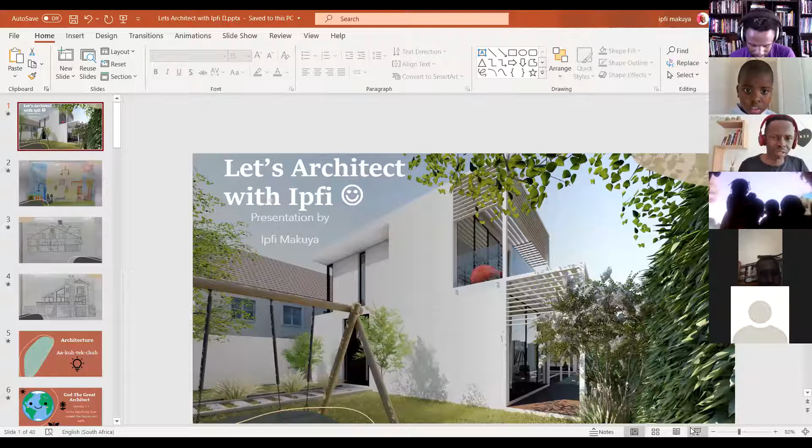Okay, all right, so I'll begin my presentation. Hi everyone, yes, our presentation today, as you heard from Lyle, is entitled Let's Architect with Ipfi, all right?

Before I go into the presentation, I'll tell you a bit about myself. I'm from a family of 5, mom and dad. I've got 2 sisters, I happen to be the only boy in the family. I'm the middle kid also, so yeah, my big sister and the little sister. Things I enjoy doing: I personally love drawing a lot of things, I enjoy listening to music, and I also enjoy meeting new people every now and then.

Moving on with the years, I started exploring Paint. I don't know if you guys use it today, but there's this application on your Windows laptop called Paint. That's where I would normally draw, like when I wanted to see how real it could be. This was roughly 2006 - I think I was in grade 4 when I was doing this.

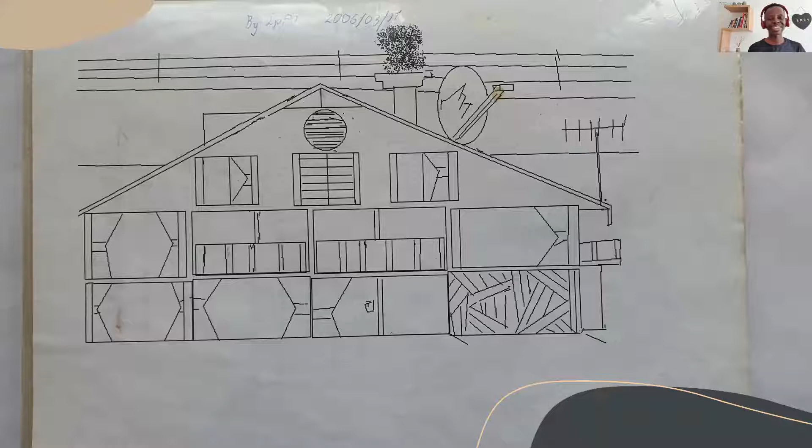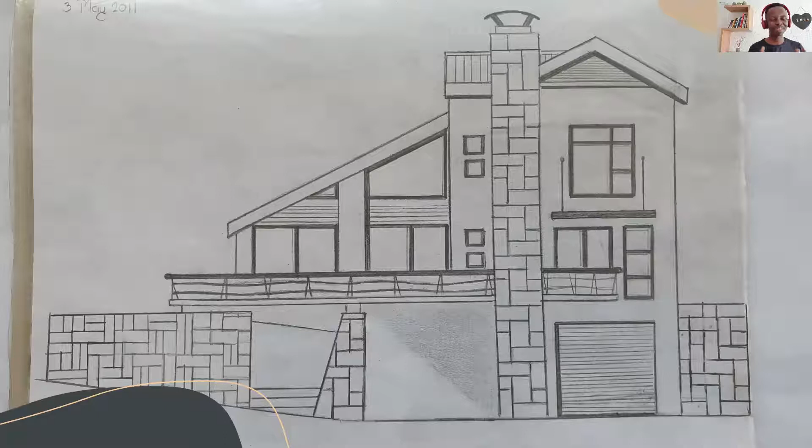I've always wanted to just draw houses, everything houses, every now and then. As time went on, it becomes a craft that one starts to perfect over time, provided I have a better understanding of how things are done. This was one of my favorite houses. I didn't design it from scratch, I'll admit that - it was a house I actually looked at, and I thought let me see if I could draw something similar. I realized I could come up with something close to it, and it's one of my favorite drawings growing up.

But now let's jump into our topic for today. Just want to move this slightly up. So our topic for today, like I said, is Let's Architect with Ipfi.

The word, of course, is architecture. I tried to put it in a way - if you fail to pronounce this word, I tried to put something very simple for you guys so that you're able to pronounce it. It's pronounced as architecture. Yeah, that's how it's pronounced. It's not a very big word whatsoever, but that's how you actually pronounce it.

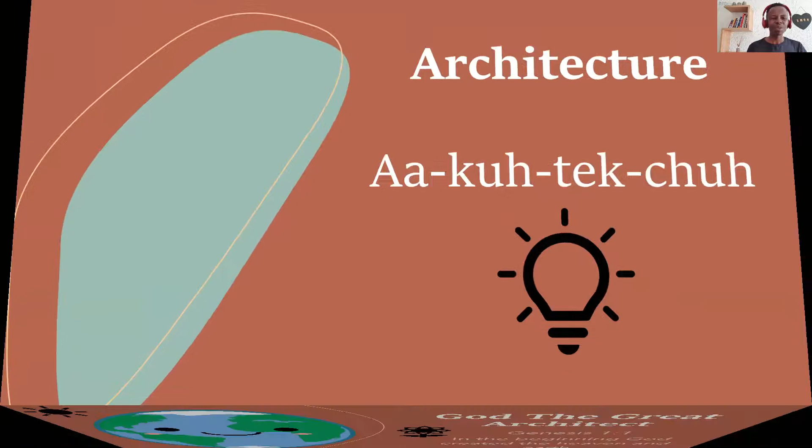And where did everything start? Everything started off way back, when God created the heavens and the earth. This is something we get in the book of Genesis 1, verse 1. In the six days of creation, God created everything that we see today, and it was good. It was beautiful. Things were lush. Things were just very lovely back then.

And it happened, sadly, that our parents were tricked by the devil himself, and eventually when they got tricked, they ate of the forbidden fruit and sin entered into the world. That's why today we have all of these bad things happening - we have people killing each other, we have people stealing from each other, we have all of these horrible things happening.

But then that's not the end, and that's just something God wants to do with us today. God wants to fix the earth. God wants us to fix the earth with Him today as we speak, and there are many ways we can contribute to this. There are other people deciding, okay, I'll join the police force and be part of those who protect people from those that harm them. There are other people saying, I will do this for the poor, for those that don't have food - I'll be there handing out food parcels and so forth. Everybody wants to do something. But today, I'm not going to focus on those people.

By the way, the guy that I mentioned earlier as an architect, that is Bjarke Ingels, one of my favorite architects. And this is a building that he designed.

So moving on, then we start seeing the word architecture, right? When we talk of architecture, this is the art or practice of designing and constructing buildings. So the things that you design, the things that are built, the things that people live in, that is what we call architecture.

Now that we know the difference between an architect and architecture, we can move on. So the question one might ask is, how long does it take to be an architect? Honestly, I used to think it takes 3 years, as long as you have a degree in your hand, you're happy, you're able to go out there and start designing and building. But the reality only starts hitting you when you start studying architecture, and they let you know that no, it doesn't take 3 years, it actually takes roughly 8 years.

So what happens is that you'll go to university. There's primary or high school, then you come into university. When you're in university, you would take your undergrad degree, and that would be a period of 3 years when you study architecture. After that you would graduate, and you'd have to be in the field for at least 1 year. This is you getting exposed to how things are run, why things are done the way they are done. So that's your 1 year experience.

After that, you are able to apply for your honors degree, which puts you on another level where you become a candidate senior architectural technologist. This is a person who is able to understand everything technical in the architecture industry. They also know what design is, but haven't fully grasped it yet. As a candidate, you'd deal with everything technical in architecture. Then after that, you have your 1-year master's degree, and that's when you become a candidate architect.

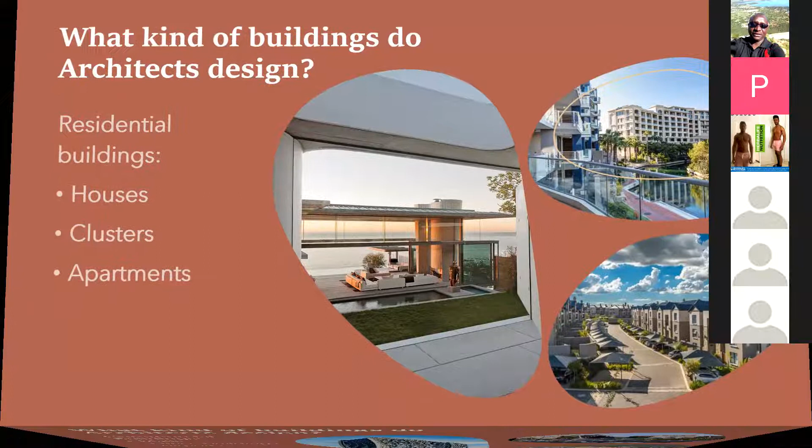Also, other kinds of buildings architects would do - you can go into healthcare, your hospitals. Remember, I said nothing is by chance - someone has to sit down and say we're designing this from scratch, we're doing this, we're doing that. Someone has to design these things. So your healthcare, your hospitals, your clinics - you like going on holidays, right? And when you get there, there's a nice fancy hotel - an architect had to come and design those things. Public schools, universities - someone had to sit down and call his team together and say, guys, we need to design a place where children can be there, able to learn throughout, graduate at some point, and give back to society. Basically, anything that is a building is designed by an architect.

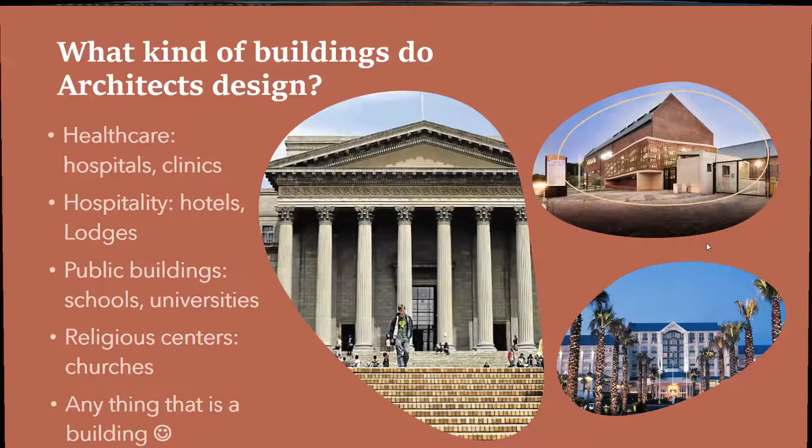Personally, I still think the secret to getting such a beautiful building was that the architect based the idea of the building - he related it to a verse in the Bible. So that's going to be homework - go check what verse this architect used in order to design such an amazing thing.

Honestly, I feel like God was showing off here, saying, oh, you're using the Bible to design a chapel? I'll also give you inspiration. This was really lovely. I love this building.

So the question then becomes, do architects only design buildings their whole life? That's a question I also once had with myself. I'm like, wait, does this mean that my whole life I'm going to design buildings and buildings and buildings? Here's the nice thing about architecture, right?

And you could also be involved in designing the next Mars cities. Lately we've been seeing a lot of rockets take off, going to space. People are curious, people want to know things. Architects can also be involved in designing those cities that are going to be on Mars. I know Mars is very far, but it would actually be a very big honor to design something on Mars. So architects can actually get involved in doing such things, designing cities on Mars.

Also, it doesn't end there. I've been following a couple of architects, and this was one of my biggest curiosities. One time I happened to watch a documentary about F1, and when they were showing Monte Carlo, I was curious like, okay, these yachts, where do you even get a designer, someone who does this? When I followed a couple of architects, I realized that actually some of the people who design these yachts have a background in architecture.

So architects don't only do buildings, you go as far as designing yachts. If there's something I love about yachts, it's the fact that you get a different view every day. Today I could be sitting in the yacht, working inside it in my little office space, looking at the Bahamas islands. Tomorrow I'd be somewhere else in the world. It really fascinates me that this is the kind of thing your architectural degree can actually get you into.

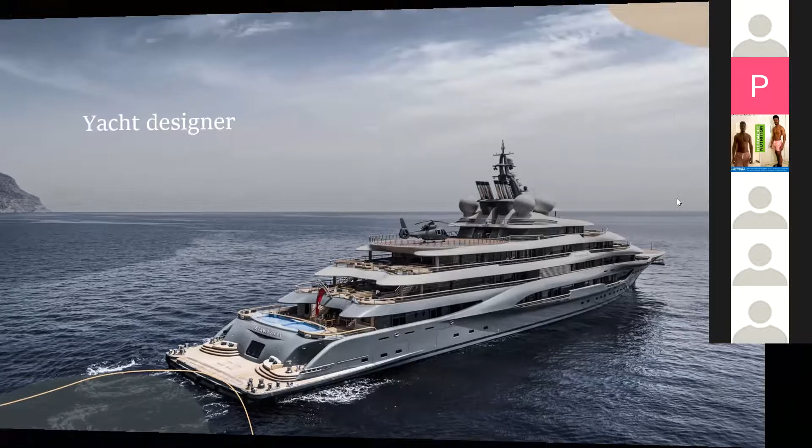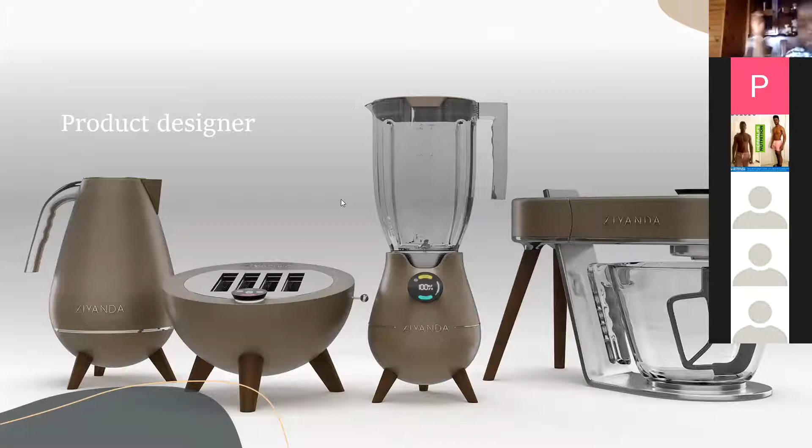And you can also go into product design. Now, we tend to just take things for granted, like the appliances in your house, your Smeg that everybody loves. I purposely put this up because it's an upcoming South African brand, and it's very beautiful. So that's product design, we can go into that too. Like I said, nothing is actually by chance. Nearly everything around you that's designed by someone, as someone with a background in architecture, you could actually go as far as designing products too.

That brings me to who are our best friends as architects. An architect's best friends are their sketchbook and pen. The reason I say this is simply because we have ideas, a lot of ideas.

The best place to always store your idea is in a sketchbook. I have about 4 sketchbooks, and this is an actual picture I took. I use them for different things: one for taking construction notes, one for design, one for when I go to site, and one for when I want to draw sketches.

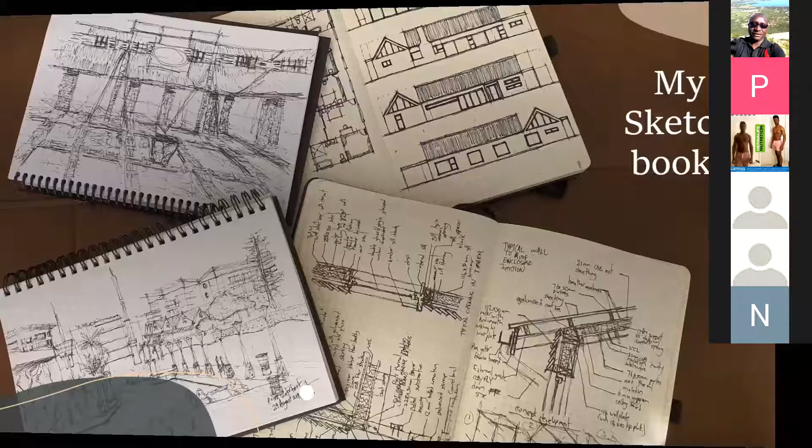This is just an example of the things I have in my sketchbooks. If there are things that really fascinate or capture me, instead of taking a picture, I actually enjoy drawing what I see, because you can capture so much more by hand than by just taking a picture. The other two I use when I'm designing, trying to be technical and draw things to scale.

This one with a lot of notes is the one I actually use in school currently, my construction sketchbook. Whenever I want to understand a detail, it's wrong to just assume you understand. You need to draw it out to fully understand it, and you don't forget things when you draw them out.

Like I said earlier, I use my sketchbooks to sometimes just capture images instead of taking pictures. That's one of the sketches I did when I was in Durban at the beach. I took that sketch instead of a picture, and it really means a lot to me.

So what happens after you have an idea, you've sketched it out, and you've decided this is what you really want to do? Ideas are then tested and finalized on CAD, which stands for computer aided drafting. There are a lot of programs we use in architecture to test our ideas and finalize them.

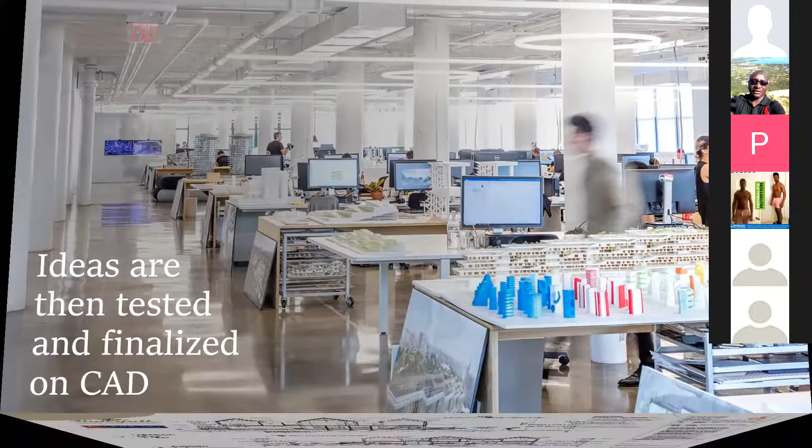Moving on, this is just an example of a computer-aided drawing. When we do drawings on the computer, you need to show nearly everything: how the roof works, which walls are which, how deep they go, what kind of foundations they have, and the windows. Everything needs to be detailed, you need to show the measurements. Nothing in architecture is by chance—everything we do was calculated, drawn, and put into detail.

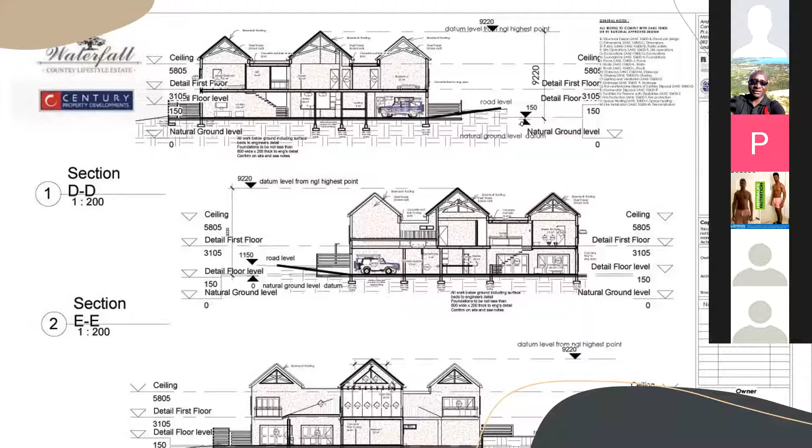So that's an example of a working drawing slash construction drawing. You need to show everything. So what do we do from sketchbook to the computer? The computer will produce drawings, and these are the drawings that you would submit at the municipality, and they would approve them and say, hey, you are good to go build your building. So that's what the working drawing is intended for.

Now, the other thing I have to say is that architects do not work in isolation. What I'm trying to say is, think of Bob the Builder, my favorite cartoon—I might be old, but I still love it. When I say architects do not work in isolation, I mean that when your drawings are approved, you need other people to come into the picture and help you build whatever you have drawn. As someone studying architecture, our biggest goal, nearly every student's aim, is that whatever you draw could one day actually be built. And that's where Bob the Builder comes in—he comes with his team, the guys who actually build the building, and make sure the construction matches the drawings.

So architects never work alone, there's a whole team. You've got your engineers, your quantity surveyors, your electricians, your plumbers—it's a whole team. So architects don't work alone. Architects always work with who? Bob the Builder. I call every builder that, because I really love them for what they do.

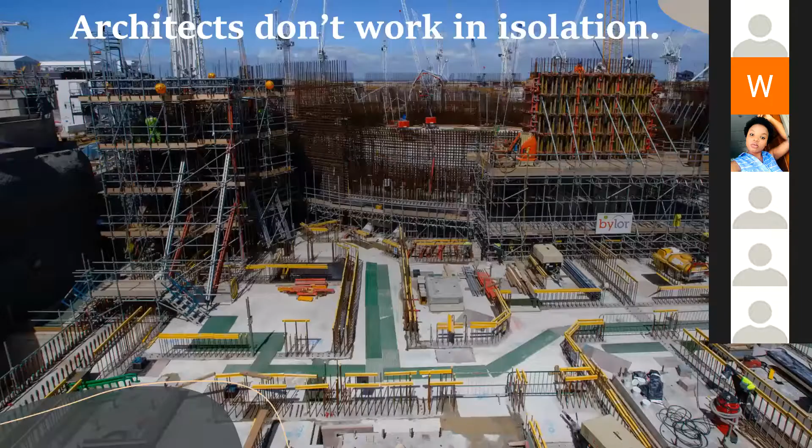So if you're curious what Bob the Builder does, he's responsible for the construction of your building. This is a picture of a nuclear plant that's been constructed. As architects, we can't do this—we are able to draw and design everything you see, all these beautiful building structures, but we can't build them. We need another team to come in and build. And like I said earlier, that's where Bob the Builder comes in and helps us build these kinds of buildings.

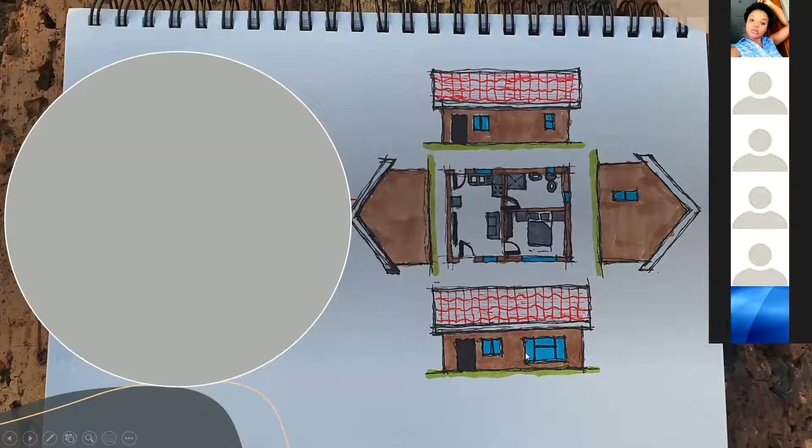So here's the first thing I want to teach you guys. Normally when I approach a house—if I come, I hope you can see my mouse—from this side of the house, the bottom picture, let's look at it. If I come from that side of the house, I could call that side the front of the house.

And if someone else comes from the other side, the top picture, they could call that the front of the house too, because they'd say, 'but I came in from this side, this is the front.' Why would you call that the back and why would I call that the front? So there's confusion about where's the front of the house and where's the back of the house.

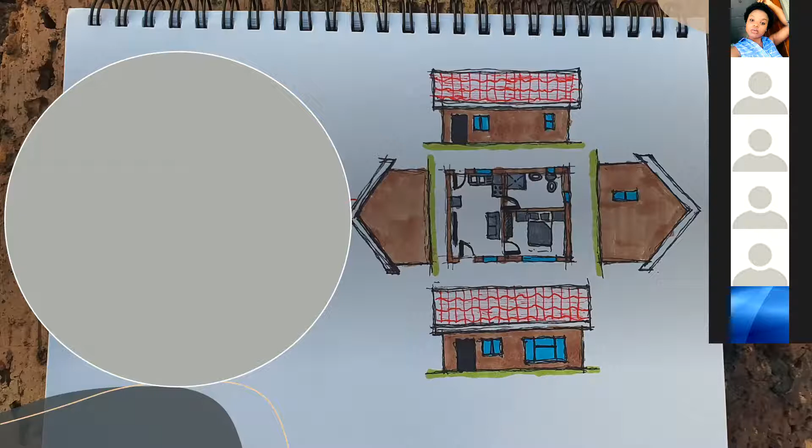So I'm going to teach you something small in architecture that we use to help us know where is where. Like I said, you could tell me the top picture of this house is the front, and I could tell you the bottom picture is also the front. It would become a whole discussion, a whole debate, and we might never really reach a conclusion. So what I have here for you—sorry, I didn't mention it—is a floor plan, showing a little sitting room, kitchen, bathroom, and bedroom.

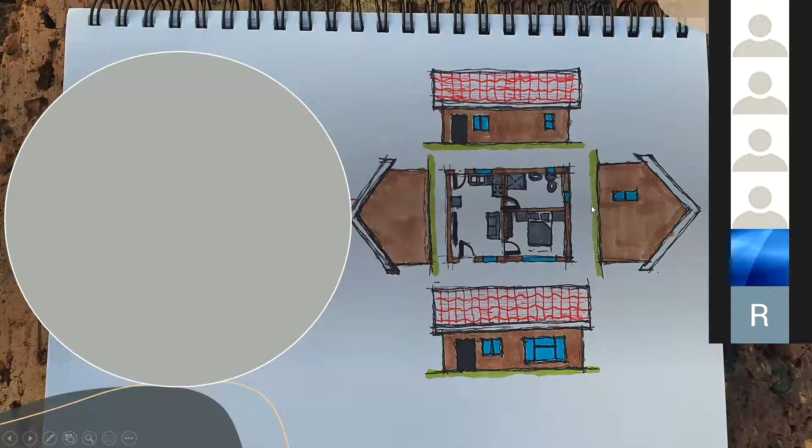And then the house looks like that on the outside. So yeah, we could have this confusion of, oh, that's the back, that's the front. So in architecture, to avoid that confusion of saying this is the front, this is the back, there's this thing that we call the north point.

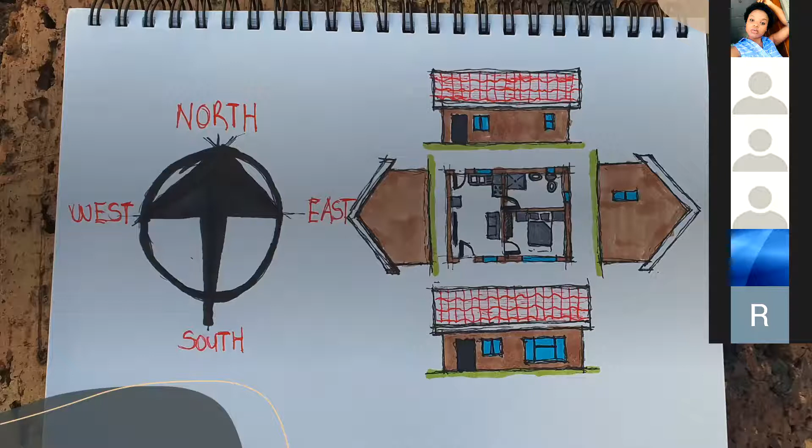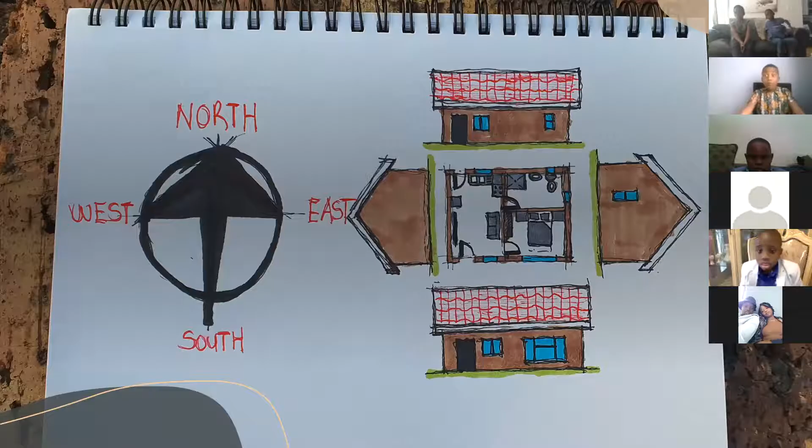We use that thing specifically to show us the certain sides of the house. For example, when we look at this house, if someone asked you which side is north, you would tell them it's the top image, the top picture. That's the northern side of the house. But in architecture, we don't use 'side' to refer to a side of a house. We use this word called elevation. So the one you see on top, you would say that is the north elevation.

And then you would see the image of the house on my right and left. I always have an issue with this. But the image on the right hand side, you would call that your east elevation. And the bottom image, this side of the house, we would call that your south elevation. And then this part of the house over here, you would call that your west elevation.

Any building that you see designed, any structure, any hotel, be it a mall, be it any kind of building that you can think of, it always uses this principle. We use this principle to identify certain sides of that particular building by saying this is the north elevation, this is the east elevation, this is the south elevation, and that is the west elevation.

Even your house, if you can get where the north point of your house is, you would start knowing that, okay, so that side we always come in from, the garage side and everything, that's the northern side. And then the kitchen side, that's the south side, that's the south elevation of the house. Any building uses this principle to know which side is which. That's something you learn throughout your architecture journey. I wish I could teach you guys how to design, but that's a process.

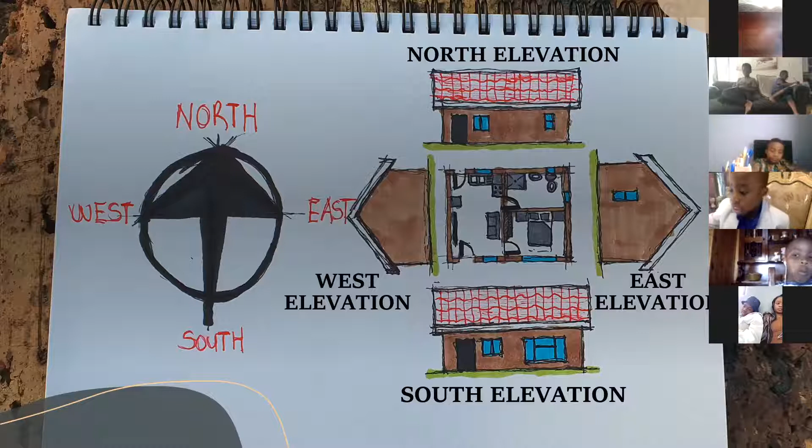You can write it down somewhere, because all of these words that you see on the screen are going to disappear. I don't want you guys to have an issue remembering where is what. So just write down these words somewhere on a paper. Remember, what you see currently on the screen is not always going to be like that in the game. I just want you guys to finish writing down. I'll give you 30 seconds to write down north elevation, east elevation, south elevation, and west elevation. Just remember these words.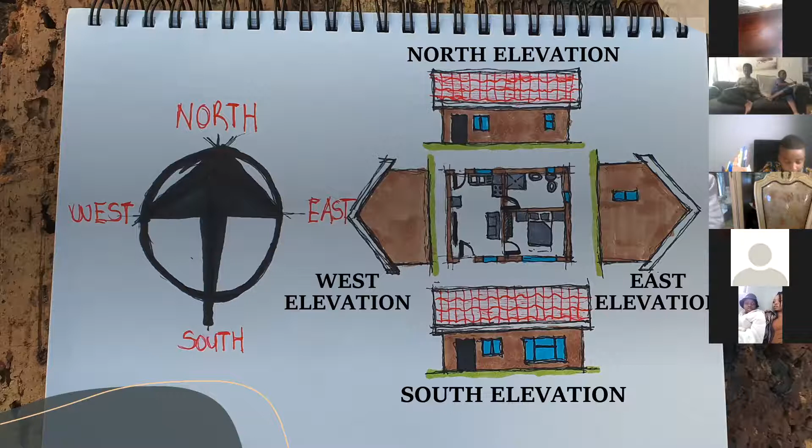Okay, we are going to start our little game. Our game is called Archi Game 1, and it's called Elevations. Remember, I was teaching you elevations earlier on? We're gonna work with elevations. So I hope you guys wrote down those words somewhere because our game is starting in a few.

And we're gonna begin our game now. So like I said earlier on, wherever the arrow is pointing, that will always be your north, right? And we're working clockwise. Don't write anything as yet, the game hasn't started. I'll give you the instructions now. So the game is very simple - well, I want to believe it's simple.

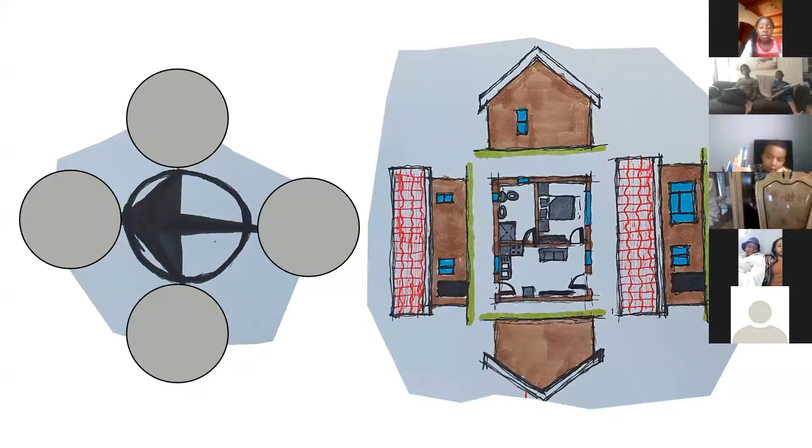But the game is very simple in the sense that I'm gonna ask you guys to identify certain elevations, but you're not gonna write it down - you're gonna have to draw that elevation. And the game will begin now. So there's your arrow. I've told you that whenever the arrow is pointing somewhere, that is what it is. And I want you guys to draw for me the west elevation of this house. So when I say elevation, I just want you to draw one of the sides of the house that shows that this is the west elevation.

I'm gonna put a timer, and I want you guys to draw the west elevation. So it's just the side of a house, right? You can draw it straight like that, or you can draw it as you see it on the screen. Your time starts now, I'm giving you 2 minutes. Let's draw it quickly, and you don't have to be perfect.

Draw the west elevation. I want you guys to draw the west elevation. You have 2 minutes to do this. Don't have to be perfect. You can scribble like me, it's a nice thing about architecture, you don't have to be perfect, just scribble. So draw your west elevation. I want to see if you guys remember the things I was teaching you about the elevations.

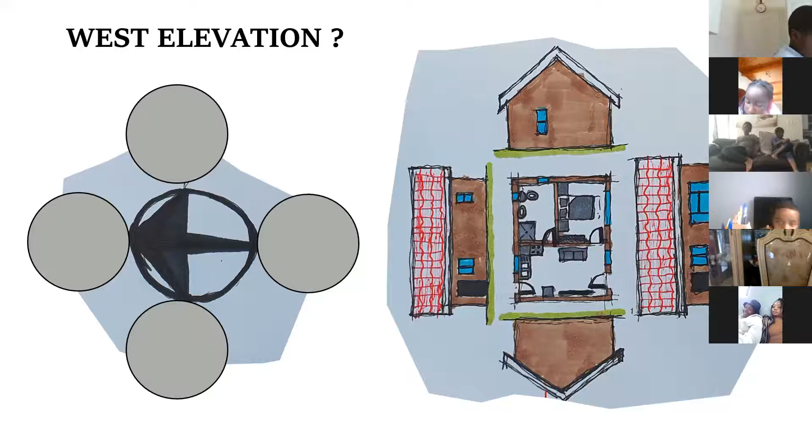Think about it. Remember, I told you that wherever the arrow is pointing, that's your north. And we always move clockwise when naming these other parts of the circles that I covered. So over here it's something, over here it's something, over here it's something. But I want you, from the house, to draw the west elevation.

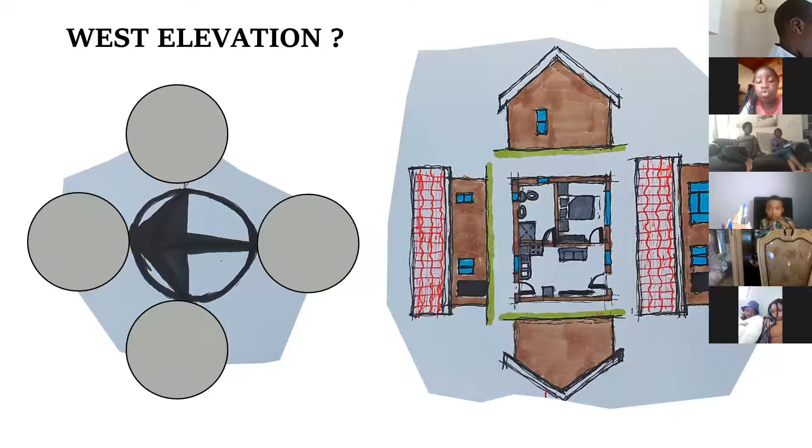You guys have a minute remaining. West elevation, which one is it? I'm counting down now: 30, 29, 28, 27, 26, 25, 24, 23, 22, 21, 20, 19, 18, 17, 16, 15, 14, 13, 10, 9, 8, 7, 6, 5, 4, 3, 2, 1, and stop. Stop.

Okay, so I'm gonna stop sharing the screen, right? And I want to see from all the cameras what you guys drew. Okay, I'm done. Mine is the... okay, next thing.

Mufara Wedu, let's see. Okay, alright, I see. Lungile, get closer to the camera, get closer, we can't see. Ah, alright, evidence, evidence. Darius, okay. B and Tadiswa, we can't see. Okay, I'm not gonna ask. Hello.

So you guys are sure, you're sure about what you drew, right? You are sure about what you drew. Me, I'm sure. Okay, we're gonna reveal the answer now, right?

Tadi, we can't see. Vinsley, we can't see. Seth, Vinsley, put your camera on. Darius, put your camera on. Okay. Galaxy A, put your camera on. Wakang. Galaxy Tape A, we can't see. Are you drawing now? Nontobego, okay, your camera is off. Nontobego. Tashinga, always off, come on, put it on, let's see. Winnie Mabuza.

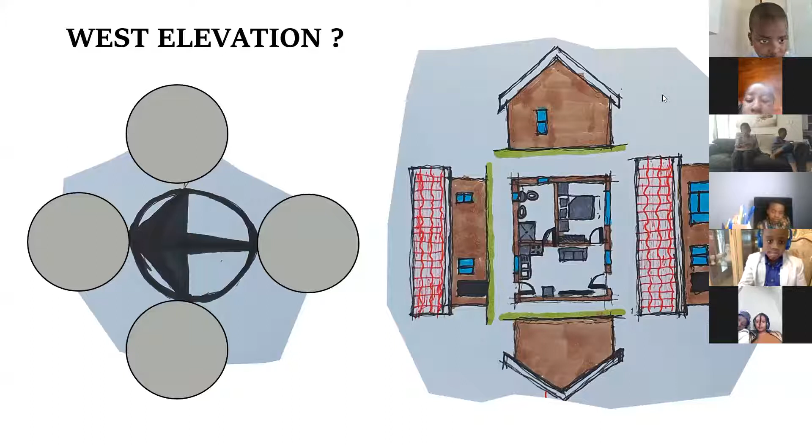Alright, okay Shepard, I think we can reveal the answer now. I'm gonna share my screen, right? I'm gonna jump back to the presentation. So yeah, Shepard, it's showing, right? Yes, the screen is showing. Okay, so we're gonna reveal what is the west elevation. 3, 2, 1.

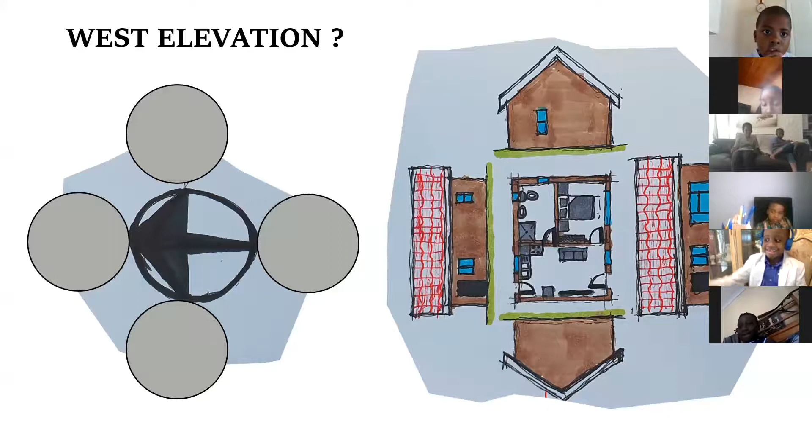There's the west elevation, it's the bottom one. Yeah, I got it, okay. Let me see, I got it. You got it? Okay, who didn't get it? Let's confess, who didn't get it?

Who didn't get it? Just show me. Rene and Mapanzura, you didn't get it, what happened? Nagabongo, what did you get? Okay, let's see, let's see. What did you draw? What did you draw, let's see. What did you draw, put it on the screen. Move it closer. Yeah, you got it also, I saw it. There, no, look at it.

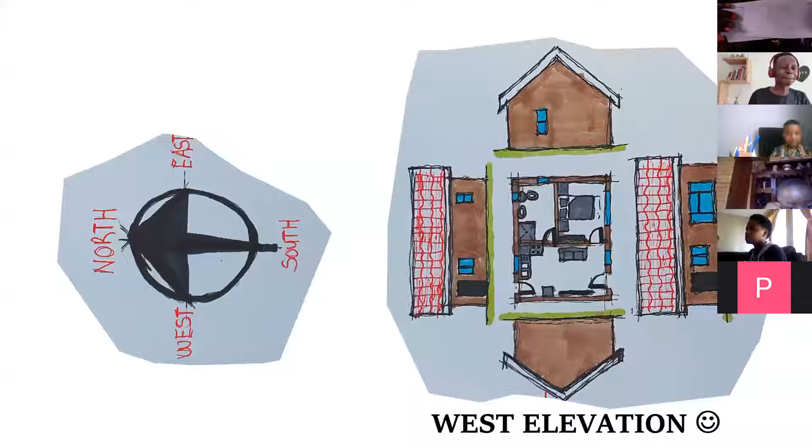How come it has windows? We're moving. It seems like that's what it had. No, it didn't have any. It didn't have any windows. It's this, okay. It's not supposed to have any windows. Oopsie, sorry, yeah, but it has. I got confused, okay, alright.

We're moving on to our next elevation, right? Moving on to our next elevation now. Now remember, do not cram or memorize what you see on the screen, right? Don't do that, because if you do that, you're going to get confused. I'm going to scramble everything again on the screen, right? So your next challenge...

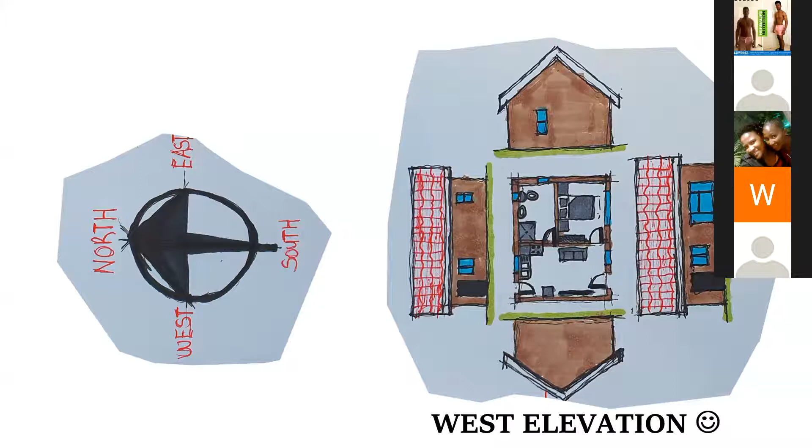I want you guys to draw for me the east elevation. I want you guys to draw for me the east elevation. And your time starts in 3, 2, 1. Start drawing, I want you to draw the east elevation. East elevation. You have 1 minute 45 seconds remaining.

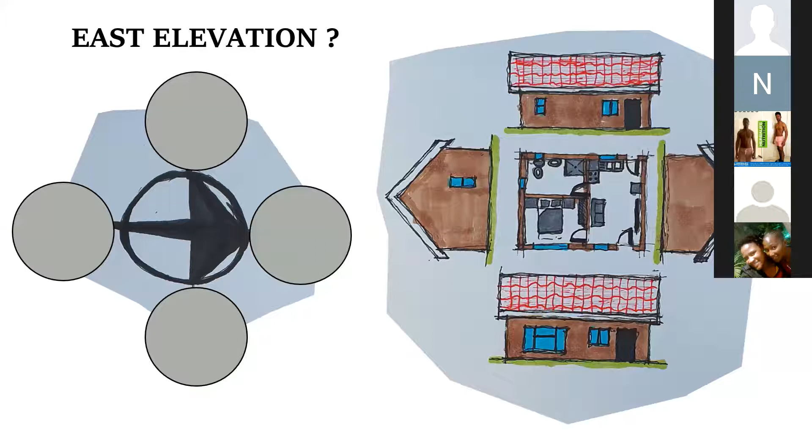One minute 30 seconds remaining. One minute remaining, 1 minute. Quick, quick, go this quick. Remember, you don't have to be perfect. You can just scribble, but as long as I'm able to see what exactly is your east elevation. 45 seconds remaining.

30, 29, 28, 27, 26, 25, 24, 23, 22, 21, 20, 19, 18, 17, 16, 15, 14, 13, 12, 11, 10, 9, 8, 7, 6, 5, 4, 3, 2, 1, and stop drawing. Everyone stop drawing. I want you guys to show me which one is the east elevation.

I want to see the east elevation, east elevation.

Okay, I'm about to reveal the east elevation, right? 3, 2, 1. There's the east elevation.

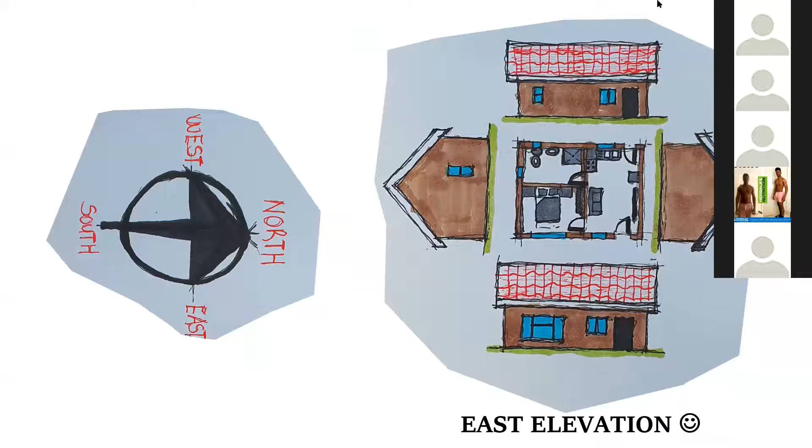Yeah, got it, okay. You guys are quite smart, you're very smart. Okay, you guys are very, very smart. Got it, right. I didn't do two. I need to stop sharing.

I want to see by the hand who got it wrong. Who got it wrong? Just show me by your hand. Just want to see your hand. Anybody who got it wrong? Those who got it wrong, let's thank them.

Okay, I'm coming to thank you, we're gonna have to work on that. I didn't get it wrong. Let's see, that's a joke. I didn't get it wrong. I didn't get it wrong.

It was a joke, Tina, let's see. Tina, let's see, show us. Tina, come on. Let's see, let's see, today let's see. Because Tina says it's a joke. Let's see, today. Oh, okay. Got it right, he just scratched it out. I can see that.

Okay, all right, we're moving on to our last elevation now, right? We're moving on to our last elevation.

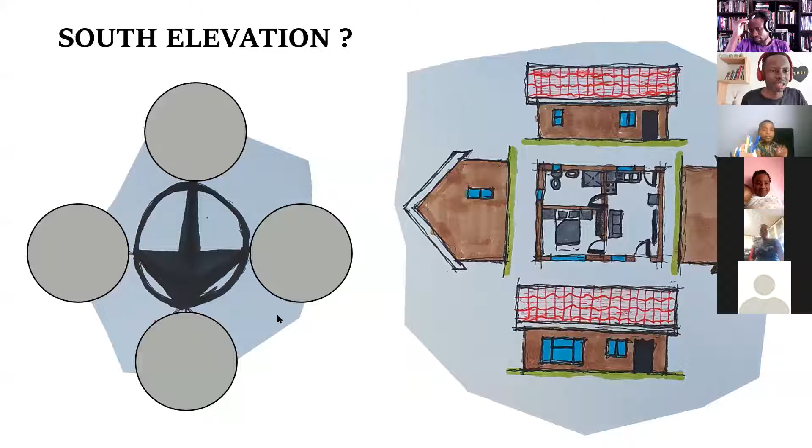Okay, I'm about to share the screen right now with you guys. We have one more elevation. Let me share the screen. So for your last elevation, let me just see if this was the previous challenge. We're drawing east, right? Okay.

I want you guys to draw for me the south elevation, right? And your time starts in 3, 2, 1, go. You have 2 minutes to do this. 2 minutes to draw the south elevation.

You're on 1 minute 45 seconds now. One minute 30. South elevation. 1 minute left. Forty-five seconds left.

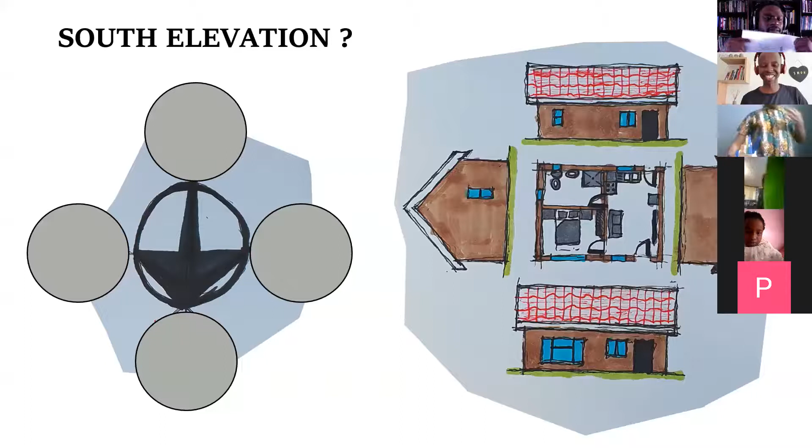Yes, so we're drawing what? We're drawing the south elevation, right? I'm gonna reveal the answer in 3, 2, 1. And let's see what is the south elevation. Okay, there's the south elevation.

Yay, I got it. I got it, there's the south elevation, I got it. I got it. Mufaro, all right. Let me just see, I got it. Let me just see how many got it right.

Give me a thumbs up. I want to see who got it right. Thumbs up. Okay, quite a lot of you got it right. Okay, well done, well done, well done.

So I want to see who got all 3 correct. Who got all 3 correct? I want you to wave this time. Who got all 3 correct? Obviously, me. Wow, you guys are very smart, you are very, very smart. Well done, I'm very happy.

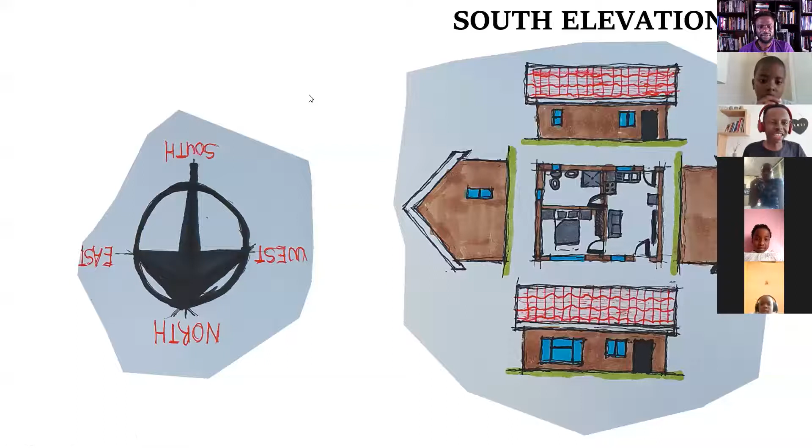Okay, so this then brings us to the end of our presentation. And I think now it's time to ask questions.

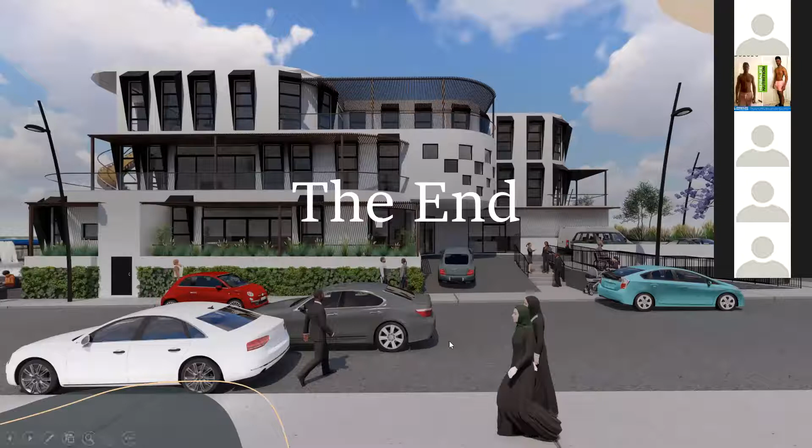Oh, by the way, this is just another building that I designed this year when doing my school project. So everything that you see in the picture, the trees, the street lamps, the people, the flowers, everything, we had to put them there. That's what you do when you do architecture. You design everything that you see in that picture.

So that then brings me to the end of my presentation. And at this moment, I'll start taking questions. Feel free to ask anything. You can unmute your mics.

I don't know, are we going to unmute them whenever they ask a question? They can unmute themselves. Okay, Lael is the one who's going to tell us who is going to ask a question. So you can lift your hands on the platform like this, or you can use the icon. Change to the icon and lift your hand. It's not like unmuted and speaking.

Okay, so I'll start taking questions. I don't know, should we? How do we do this, Shepard, in a very constructive way? Should they raise their hands up? Yeah, okay, in the chat. Yeah, evidence, put their hands on the screens. Okay, the hands on the screen. Does everybody know how to do that? Yeah, some lift on the chat, some lift on the screen. So every direction it works. Okay, alright.

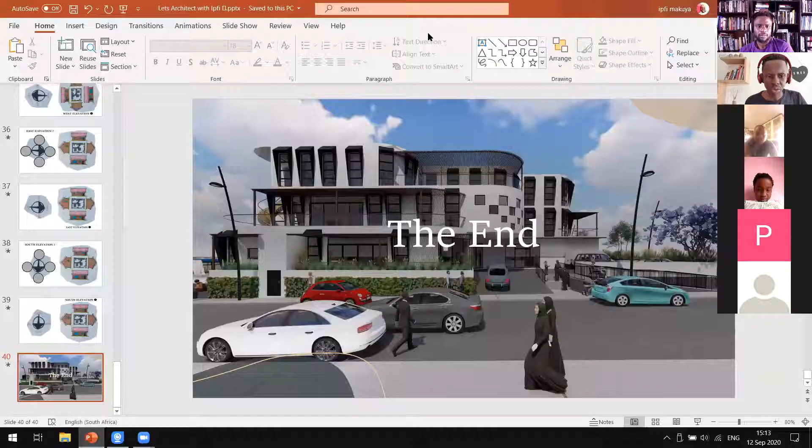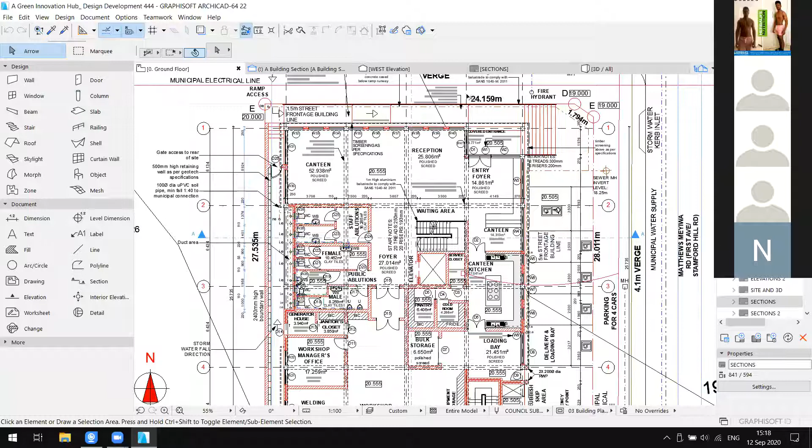So for example, here's an example, right? I'm sharing my screen now. So for example, this is a program that you would use to draw buildings. It would have all of these other things on your left-hand side. This is one of the programs, there's a lot of them. Can you see what's happening on your screen? Can you see everything? Yes, okay. So this is the program that you would use. There are walls, there are doors, there are windows, there's a slab, there's a lot of things that you would use on this program in order to draw your buildings that you want to draw and to make them look very accurate and precise.

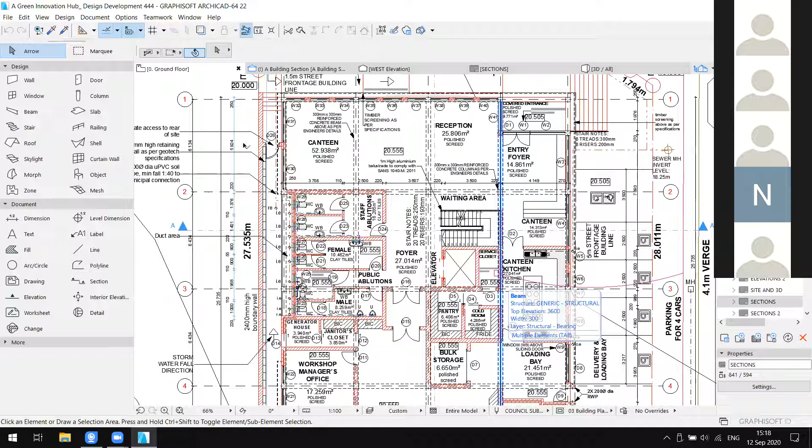So what I'm drawing here is 2D. When I say 2D, I mean it's two-dimensional. 2D means, how can I put this for you, the side of a square is 2D, and then if we turn it into a cube, that's 3D. So what you're seeing here, I'm drawing things in 2D, but what the program does for me, it starts drawing everything for me in 3D. So this is what I'm actually drawing.

What you saw on the ground floor, everything that I'm drawing, is what you see over here on the 3D part of the computer. This is a CAD program that you would use to draw whatever you're designing.

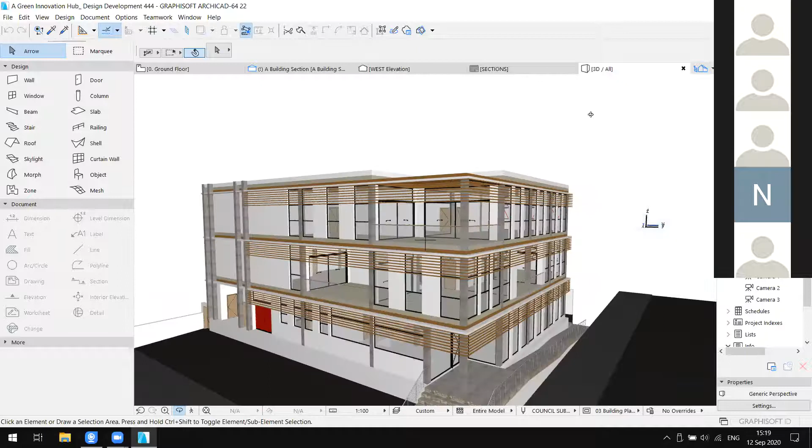It's not in the best of colors. I didn't really work on my colors as much, so it's mostly in black and white, but it's fine.

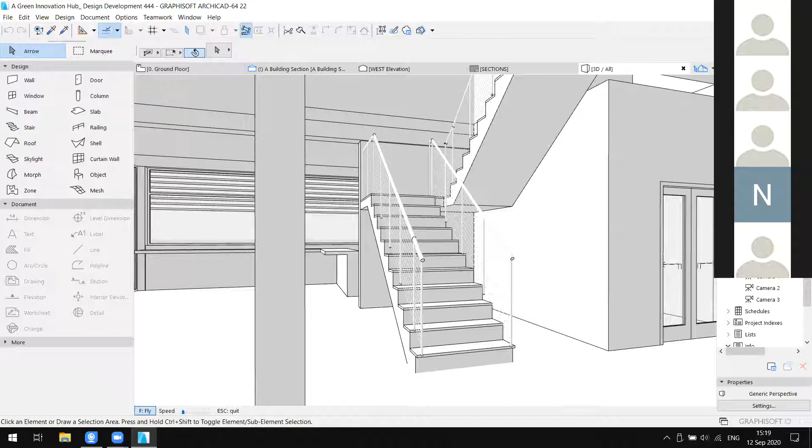So what I can actually do is take you guys into the building and show you exactly what's happening inside. I can move with you through the building, climb the stairs with you. Everything you see in this building was actually designed by an architect.

I'm still a student, so I'm learning to be an architect. This is a Green Innovation Hub.

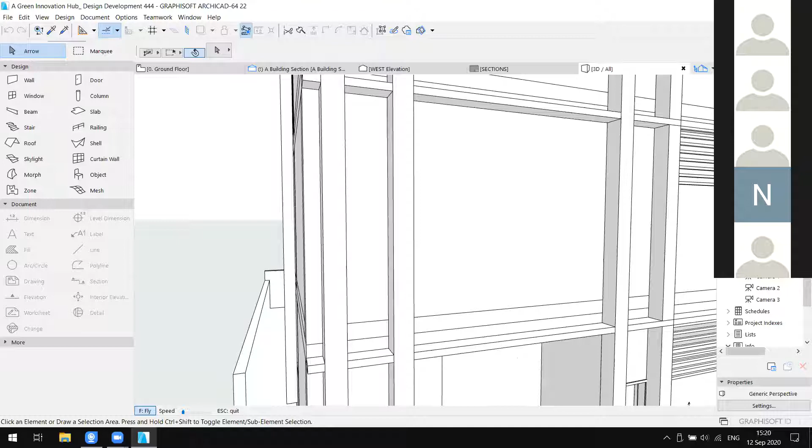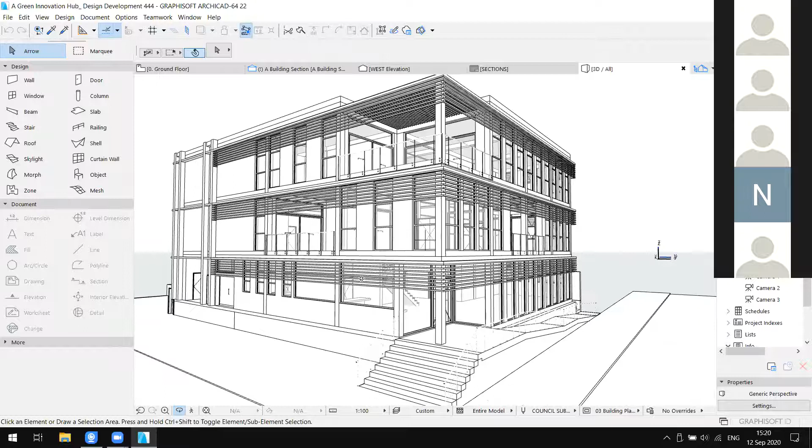This is where people would come to create and develop ideas about saving the world—like instead of wasting water, what can we do to save water? People actually come and meet here to have meetings, making sure these ideas can be used to make the world a better place.

I'm just thinking, is there another project that I can show you guys? Well, I don't really have one. I think, yeah, let's not, yeah.

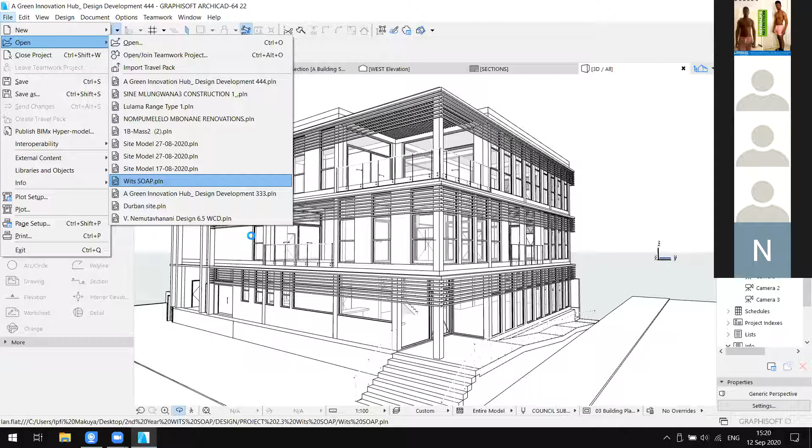But like I said, CAD is a program that you use in order to draw your work and show it more precisely and accurately. So these are the programs that we use.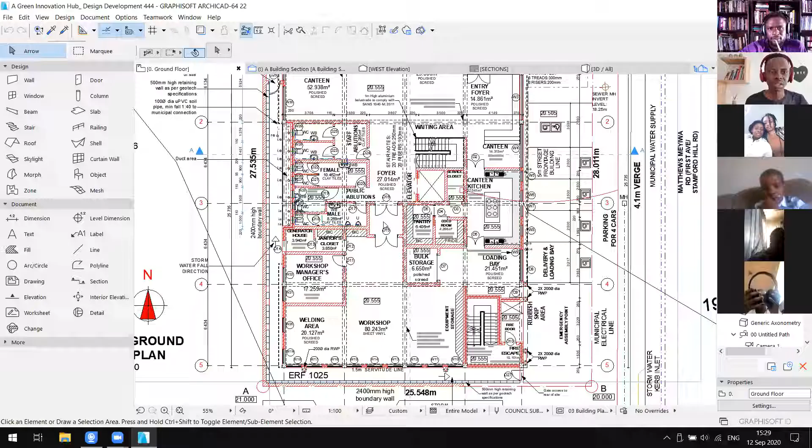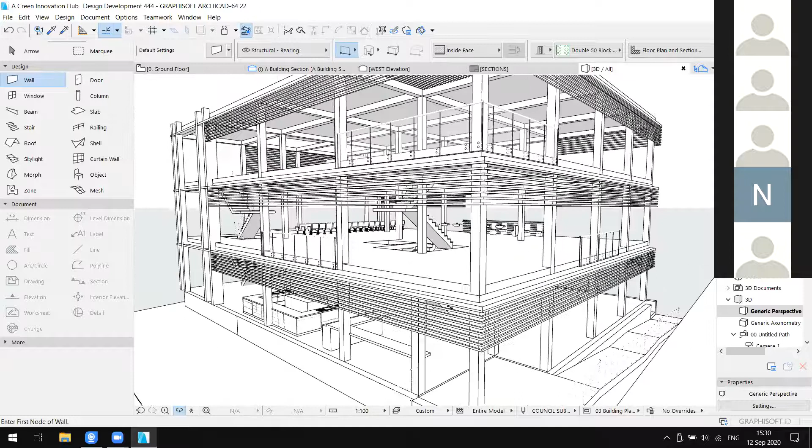It's nearly open, and I'm sharing my screen now to show you exactly what a beam is. Let's do this - I'm going to show you something very quickly. I'll highlight all the walls and delete them, so you can see my building. Can you see the screen? In a building, there are certain things that hold up each other.

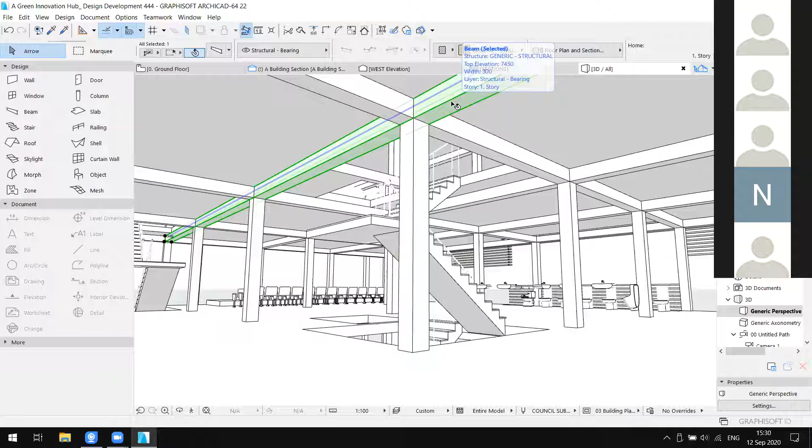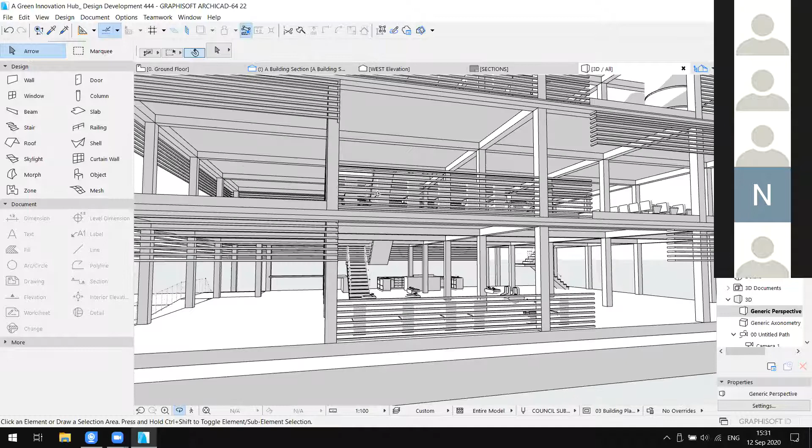So what you see over here that I'm touching, that is a column. That's a column. The beam is this. These are beams, the things that are lying horizontal. Yes, those are beams. So these are columns and these are beams. Beams and columns work hand in hand. You cannot have a building that's got beams but then doesn't have columns. So it's advisable most of the time that you have columns and beams. So as you can see, from floor to floor, it's like the skeleton of the building, the columns and the beams. It's what holds up the whole building. Can you see that? Yes, so that is a beam.

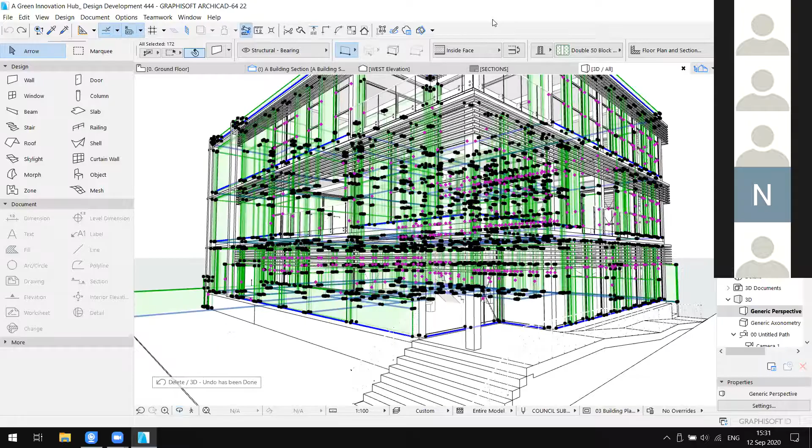So I hope I answered you. Did I answer you? Yes, okay, all right. Evidence has a hand up. But I see Tine. Is it Tine? Yeah, evidence has been lifting up on the screen. We'll come to Tine, okay. Oh okay, evidence, unmute yourself. Evidence, you're muted, can you please unmute yourself? Yeah, it's unmuted now, okay.

What's your question? I was asking how many days can you finish a building?

Okay, how many days does it take to finish a building? So your answer, I can't give you an exact answer, because buildings are not all the same. That's the first thing we need to understand. But if you were to build a house, it could take you a month, it could take you two weeks, it depends on what material you're using to build your house and how big the house or the building is. There are some houses that take even a year to build, some even take three years, you know. It depends what material you're using and what kind of structure, how big the structure is. So I wish I could give you an answer and say buildings always take five months, but the reality is sometimes buildings can take even three years or five years to build. So that's the answer I can give you.